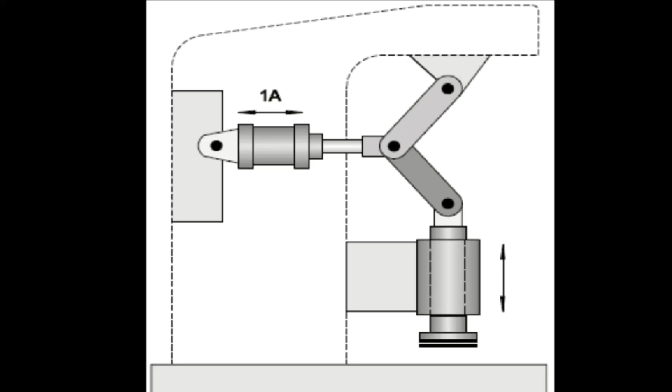Hello friends, my name is Olivier Mubito from IPRC Kigali, and today's situation is a stamping machine that needs to stamp the parts or the papers which might be used in the workshop or in the library. We are still in the design and construction of electro-pneumatic control circuits, so we are in part 4.

So how does it work? Parts are to be stamped with a stamping device. By pressing 2 push button switches, the die is pushed down and the part is stamped. So this is the die that goes down to stamp. When the stamping pressure has been achieved, the die is returned to its start position. It means after stamping, it has to return to its start position.

So what causes the die to go for stamping? It's this cylinder, which is 1A. It is the one that forces the die to go for stamping and to return to its start position. And then we're going to analyze why 2 push button switches. I think it's all about security measures.

Suppose that you are an operator of a machine, you are in the workshop, and maybe you have visitors that come to visit your workplace. There is a machine that has got 1 push button to start. Accidentally, one among the people who came to visit your working place may activate the machine without knowing what he is doing.

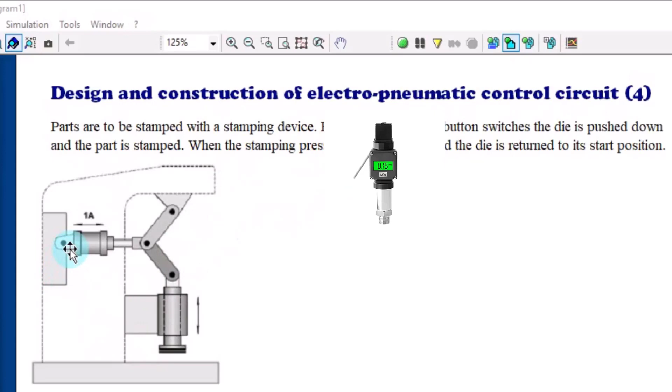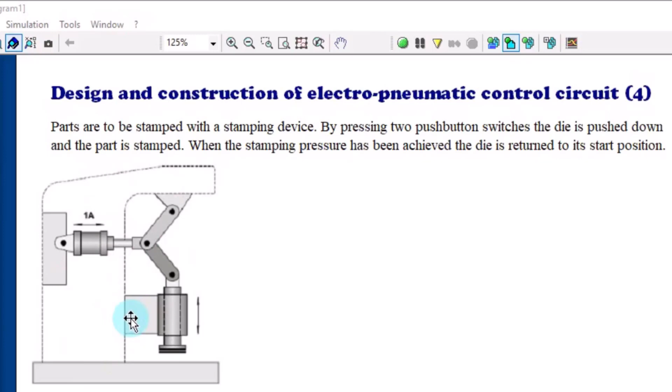When we install a sensor here, it will be sensing the amount of pressure that it receives. And if you have set 5 bar or 2 bar, it will switch on or switch off. So it will help you to control the system depending on the pressure that we have set, which means we need to go to pneumatic.

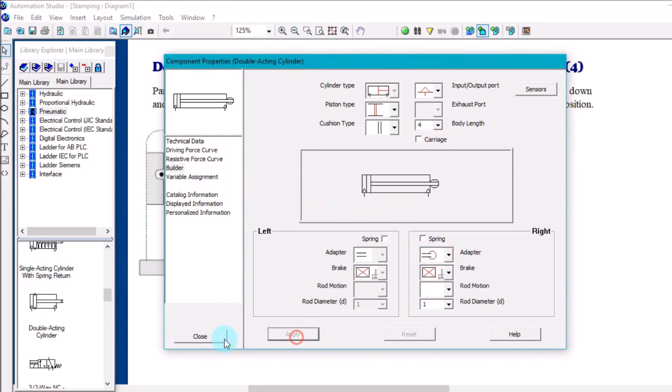So here we go. We need a cylinder. It might be a double acting cylinder or a single acting cylinder, and I prefer to use a double acting cylinder, and I increase the length up to 4. And since it is a double acting cylinder and we are in pneumatics, it goes with a directional control valve that has got 5 ports.

So this is the one with 5 ports, and then we link the ports to the cylinder, and then we need to find the supply and the exhaust. So this is the supply, it goes to the central port, which is port 1, and this is exhaust 3, and this is exhaust 5.

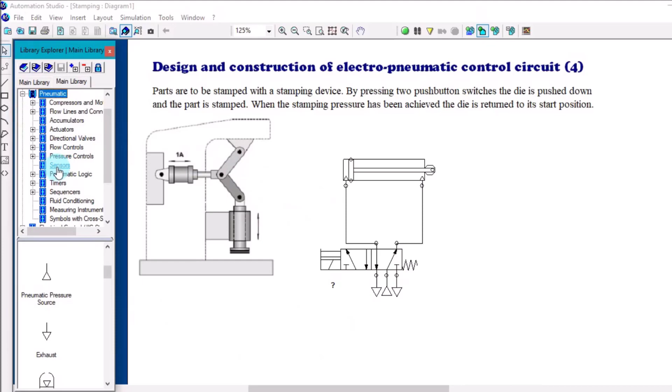So we said that we need a sensor to be sensing the pressure. That's why we go to sensor, and then we find the pressure sensor, and we call it PS as a tag name. Let us rotate for a better layout. Now we are going to choose the information that needs to be displayed. We cannot display all of this information, so I prefer to display

the pressure. The name is a tag name like PS that will be used even in the electrical control circuit, and its name, so that the viewer will remember that it's the pressure sensor. But I can also display the switching pressure if we need, and then we apply, and we go to assign now the switching pressure.

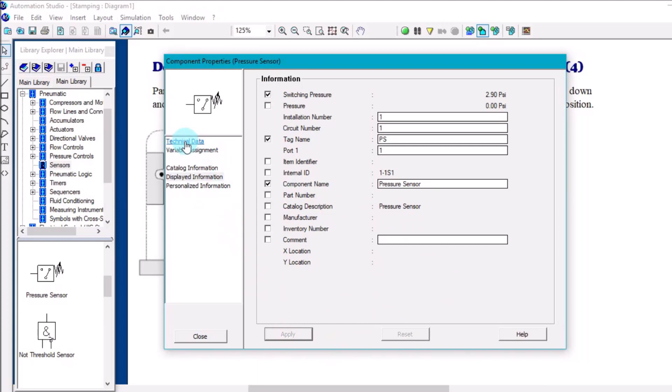I need to set this pressure in bar, and let me set 3 bar or 4 bar, for example, and we set that value. So this is the name, and this is the switching pressure.

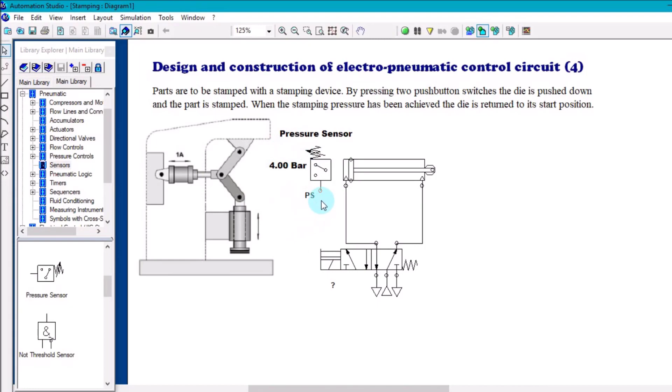So we link this port to the supply port of the cylinder. If we simulate manually, because our DCV is able to be simulated with manual operation, you can see the way this valve, this sensor is changing. By releasing, the pressure drops, it becomes blue, which means the pressure drops and it changes. By supplying, the line comes in red, which means the pressure has increased.

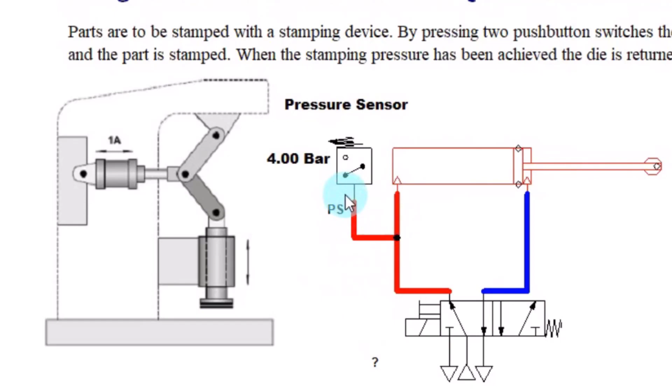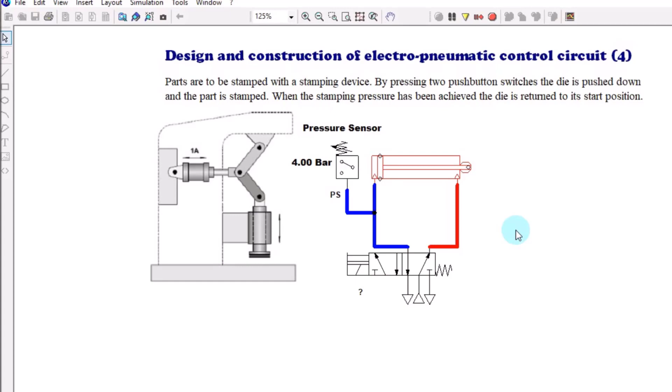So now let us think how to control, how to turn this solenoid on or off. Just like the way we turn on and off the motors, the lamps, whatever, the contactors. So it's an output device like the others. So we just need to think how to turn it on and off, remembering that when we turn it off, we are changing the position. When we turn it on, we are changing the position. So it depends. So let's go to the control circuit, which is the electrical control circuit.

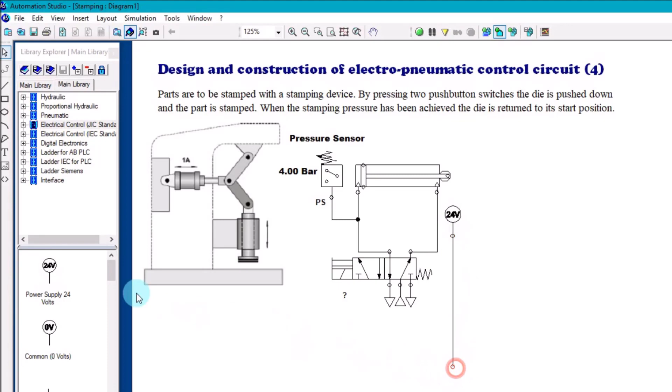And I prefer to use the American standard, which is also known as ladder. It needs a power line, which is the 24 line, and it also needs a 0 voltage, which is, okay, like that. So we have to put a normally closed push button switch, which will be considered as an emergency stop. It's normal. When you are designing a circuit, you have to think how to stop the system immediately in case there is an emergency situation.

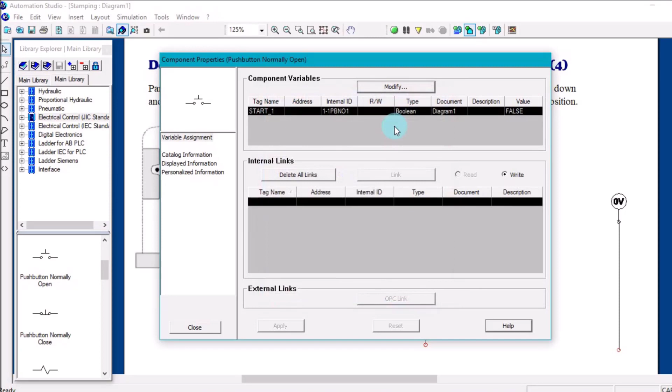Okay, and we need a start. Remember that we are supposed to use 2 starts. So this will be considered as start 1, and we need also a start 2. Call it start 2. Let me try to adjust. So we are going to ignore the use of the pressure sensor, which means we are going to connect the components without this pressure sensor to see the way it works without that pressure sensor.

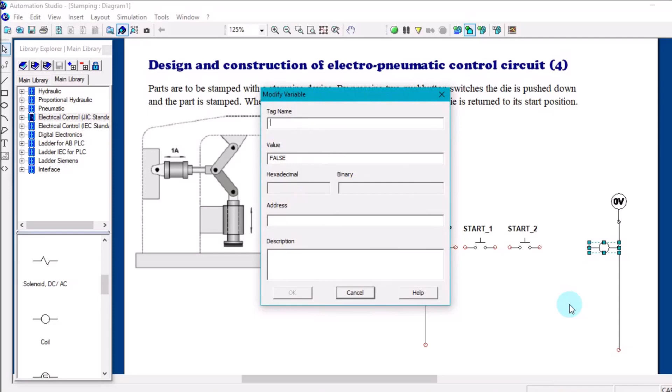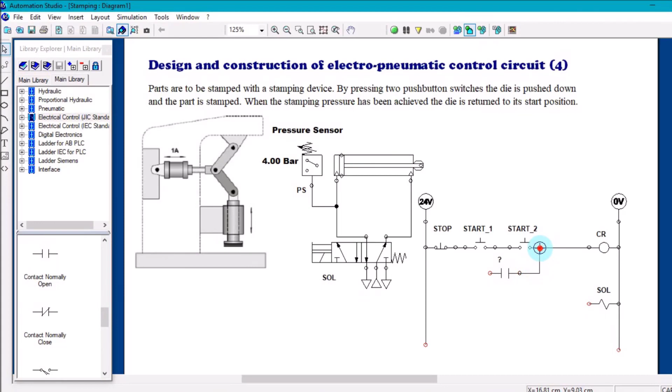So this is a coil called CR, and we link the switches with the coil, and a switch will also be provided to the solenoid, and we have to link this solenoid to the pneumatic component, which is that one. So we link its solenoid, and we need now the contacts. This is a contact to work as a hold-on. So we link it with CR, and we take the same contacts, and then it is going to the solenoid, and we are going to link it again to the CR.

So trying to simulate without the sensor here and to see the way it works. If we press start 1, nothing happens. If we press start 2, nothing happens unless we press both starts. Now the cylinder can extend, but it remains there. Even if we release here, it will not come back because we have a hold-on here. For the cylinder to retract back, we have to open the circuit by opening the normally closed switch.

Let us do it once again with the animation. Again, we press this one and we maintain it, and then we press S2. Now the cylinder can extend, but releasing this, nothing changes because we have a hold-on. So we have to open the circuit using this normally closed switch. So it's clear that we need another normally closed contact to open the circuit in case the required pressure has been achieved.

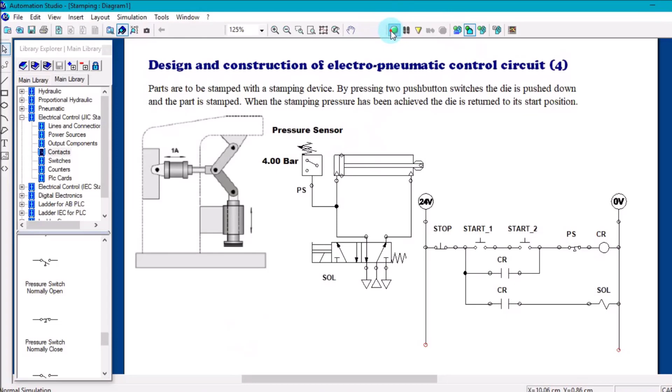Let's maintain this one and we press S2. You can see that it goes and it comes back. We do it once again, it goes and it comes back. By simulating and by having the animation, you know the system is working. We can even maintain start 2 and manipulate the first one. You can see the system is working. It means increasing the pressure on this line causes the switch to switch off this line.